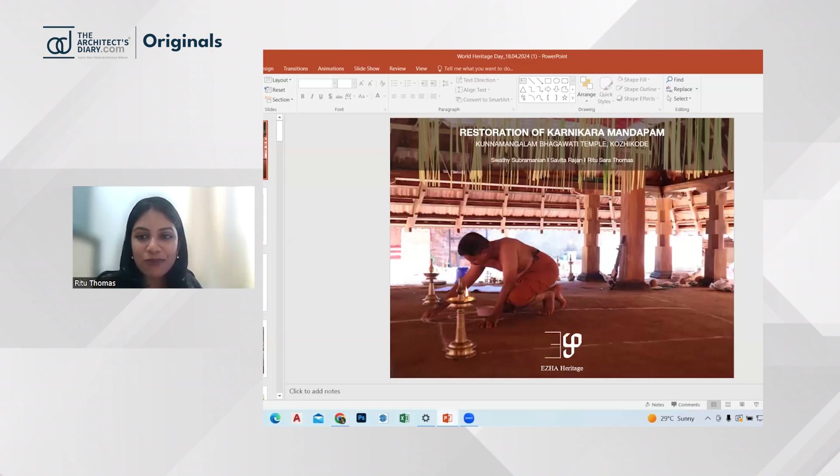I'm introducing to you the project, the restoration of Karnikaramandapam. This Karnikaramandapam is part of the Kunnamangalam Bhagawati temple, located in Calicut in Kerala, nestled within a very quaint village of Karuvanur. This temple is very significant - the significance lies not only in its religious importance, but also the deity goddess, the resident goddess Bhadrakali, is said to fiercely protect the sacred landscape, the surrounding hills, the streams, and inhabitants.

So the temple actually has a rectilinear sort of layout, which has a chuttambalam on the sides - that is, a surrounding structure - and there are 2 structures in the middle. There is a Sri Kovil, which we call the Sanctum Sanctorum, where the deity is placed. In front of the Sri Kovil is the Karnikaramandapam, or the Namaskaramandapam, which means the worship hall, where the rituals and prayers happen.

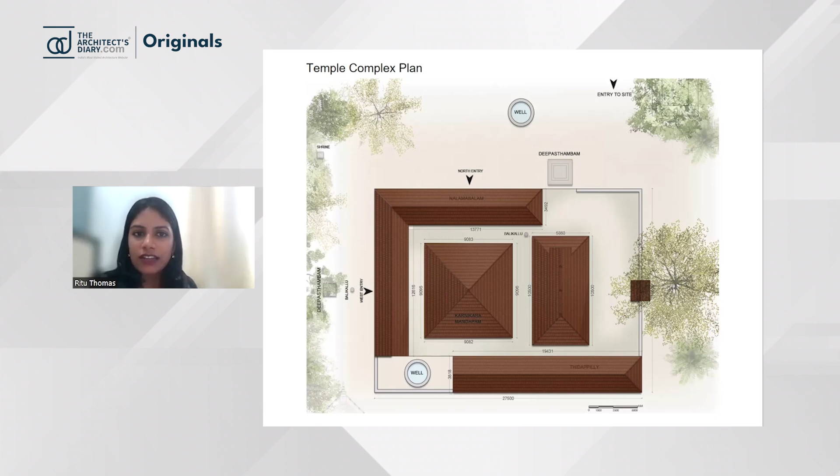But when we did an initial inspection, as all conservation architects do, and went for the site visit, this is what we encountered - teak wood in the style of architecture, with a laterite stone plinth, and the superstructure made of timber. There is mud flooring also on the base, which we call the plinth, or the adhisthanam. This mud flooring is used for rituals, prayers, and other ritualistic performances.

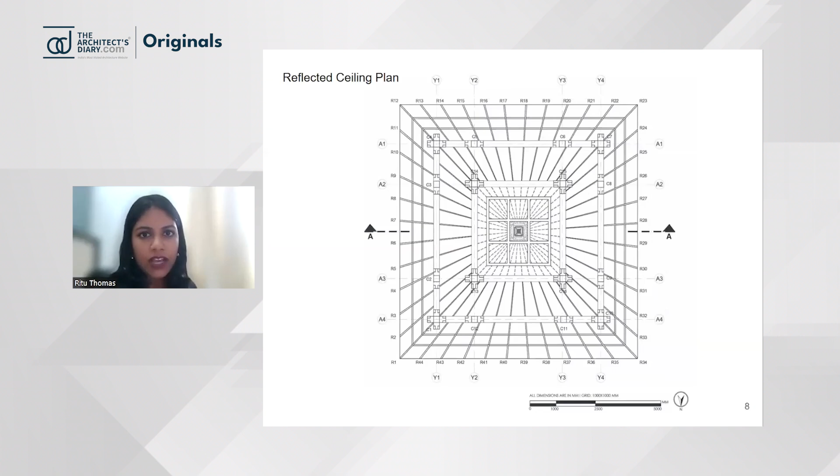Here, when we encountered this, we also did a very detailed documentation of the entire mandapam - the center and the rest pillars on the edges. The name Karnikaram comes from the number 16 - Karnikaram in local terms means 16. That is why the significance of the name comes about. It is also said to represent the 16 syllables of a mantra and the 16-petaled lotus. All of this signifies the name Karnikaram.

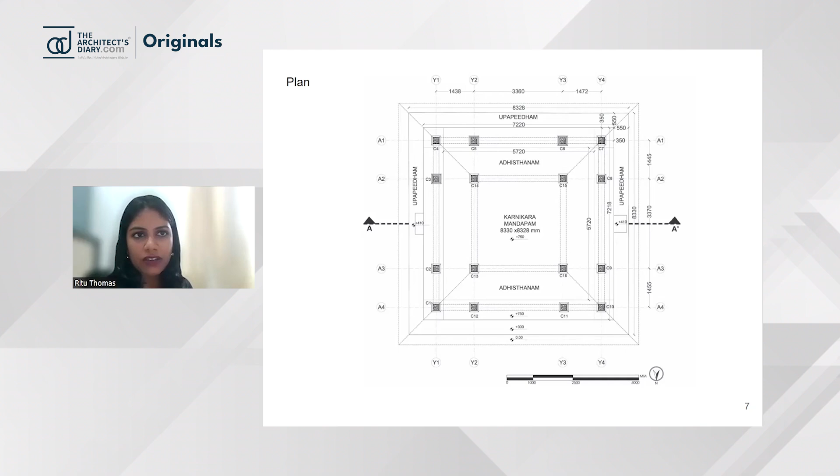So after this is the plan actually of the mandapam, and beyond that we have also detailed out the section and the reflected ceiling plan. The finial was actually missing - the finial is the top portion, or the crown of the mandapam, we can say.

This finial and the structure below it is called the koodam. These are very essential components of the timber structure, which holds everything together. So these were missing and deteriorated.

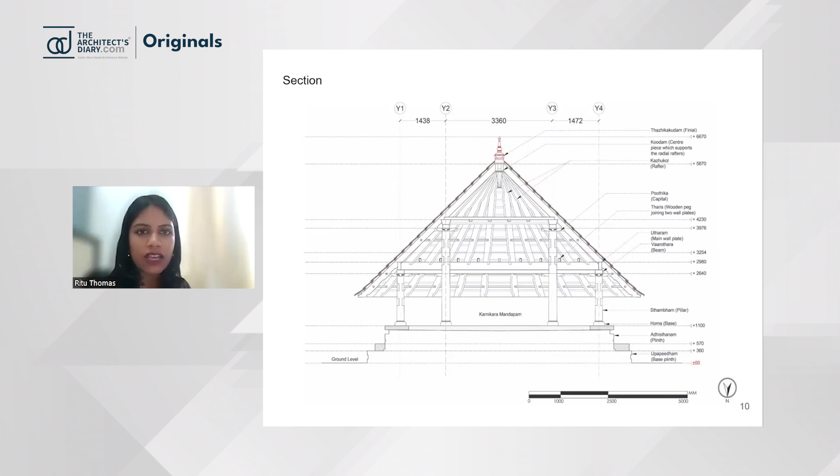When we actually encountered it at the very beginning, we saw that this was completely in a very deteriorated stage. There was neglect; this mandapam had not been used for a long time. So there was extreme termite infestation and water seepage could be found throughout.

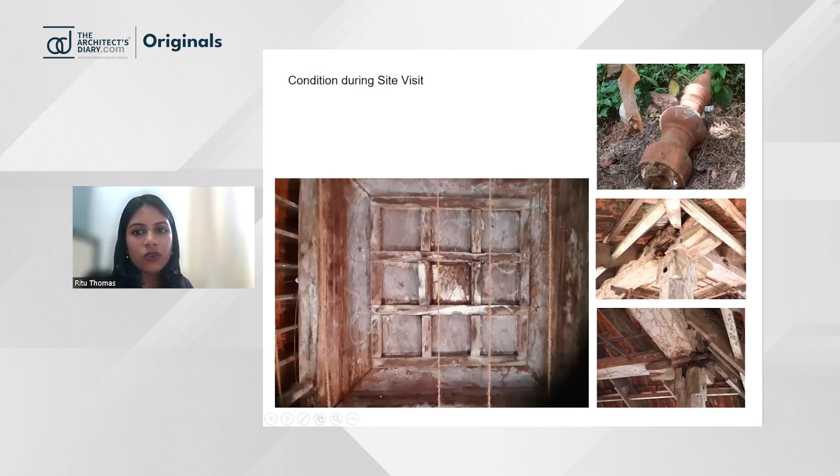This was the finial actually. The image on the top right is the finial we discovered on site later, the terracotta finial. We also took photographs, or detailed photo documentation, of the condition of the structure.

Not only was there termite infestation and water seepage, you can see that the entire column was actually hollowed out from the bottom to the top by termites. There were also fire hazards, because many of these rituals used oil in the mandapam. So there were fire hazards previously, and you could also see cracks and fungal rot.

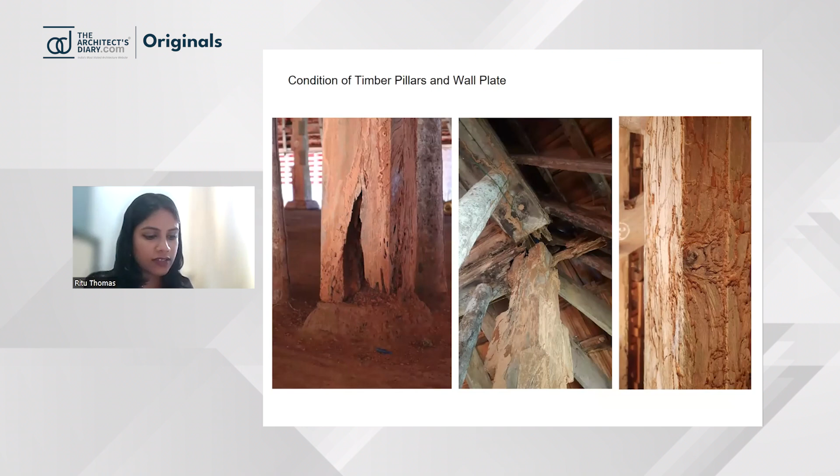So that was imminent. When we did a condition assessment of the building, we saw that the top portion, or the finial area, had caused extreme deterioration, leading to more than 80% of the timber being completely deteriorated to an extent where it could not.

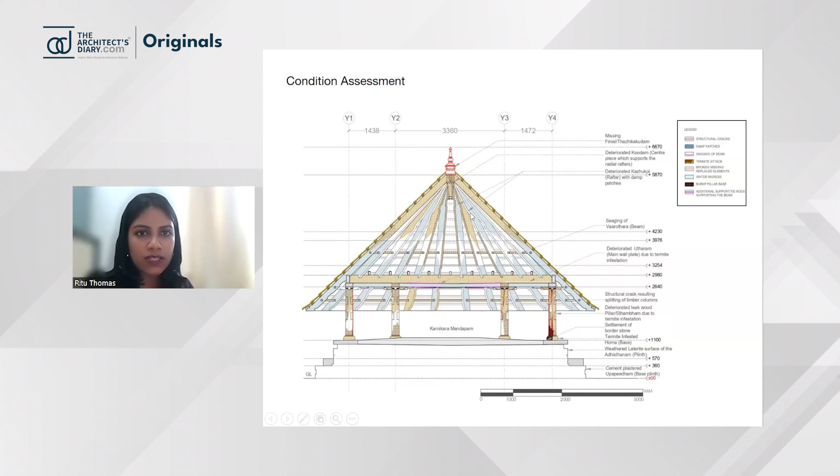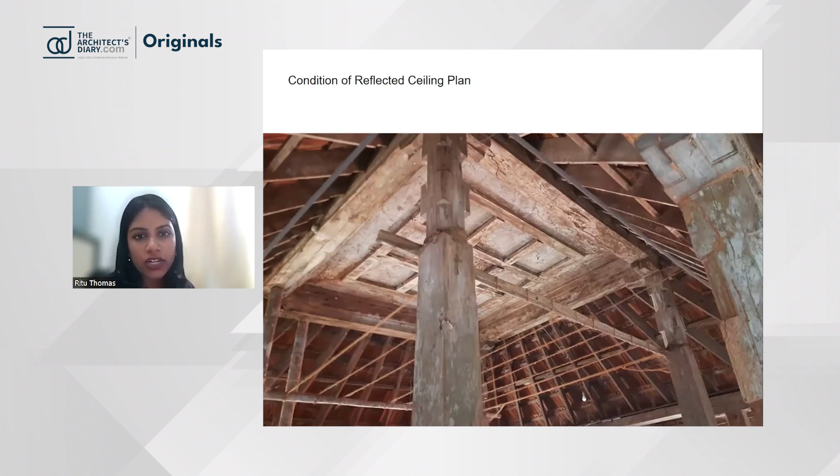It was on the verge of collapse. You can also see here that many temporary support measures, such as bamboo scaffoldings and steel tie rods, were in place to stabilize the whole structure, because this structure is very important for the temple festival. It was completely held in place temporarily, and this structure would not have survived another monsoon — it would have collapsed within the next year.

You can see the other deterioration here. This is a reflected ceiling plan showing all the detailed documentation of the condition.

The main challenge we faced was that we were told to complete the entire project — including documentation, proposal, and implementation — within a short time span of 2.5 months, because the annual temple festival was scheduled for March. We began this project in mid-January, so we had hardly 2.5 months to complete it. That was the challenge.

We had to do very detailed planning to schedule the works simultaneously, and plan how the conservation works had to happen. We know conservation is not a quick process, so meticulous planning had to be done.

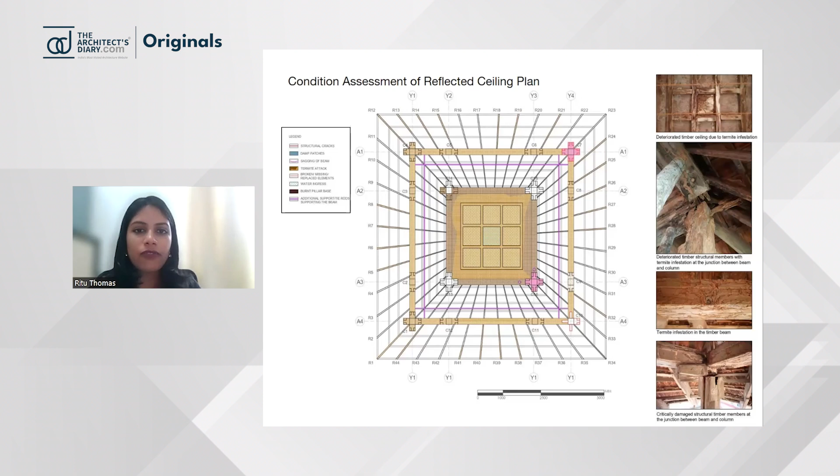Also, we had a financial constraint because we had an external sponsor who funded one-third of the project, but two-thirds of the funds came from the crowd, from the community — it was crowdfunded. So there was a very tight budget as well, and we could not be very extravagant in our design. Those are the two major challenges we faced.

So I'll pass on to Savita to explain our design philosophy, which is adopted by Ira.

Thank you, Ritu. The approach used for the restoration of Karnikaramandapam is rooted in ancient Indian treatises of Vastu Shastra and Tachu Shastra, with the help of traditional carpenters and acharyas. Vastu Shastra, in simple terms, is about creating spaces in alignment with natural forces and energies, whereas Tachu Shastra is about using locally available materials and designing in a way that does not harm the environment. So we've used these concepts.

The conservation philosophy we have applied here is Jirnoddharana and Punarudharana. Jirnoddharana means deliverance from decay, and Punarudharana means regeneration or restoration. So our conservation philosophy combines both: preserving existing stone and laterite fabric to prevent further decay, while restoring or replacing the deteriorated timber with the original materials.

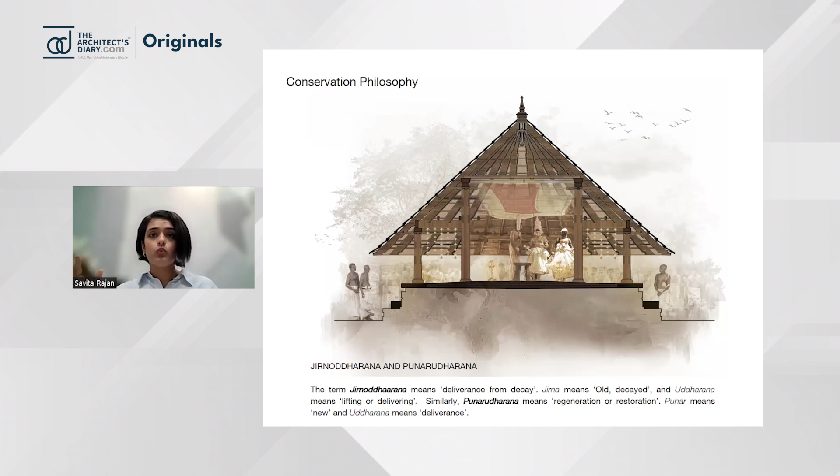Now we can look at the isometric view. When documenting traditional construction methods, it's very crucial to understand their purpose and how they work. Understanding this reveals how they strengthen the structure, and also enables us to learn from the tradition, which can be an inspiration for modern creations.

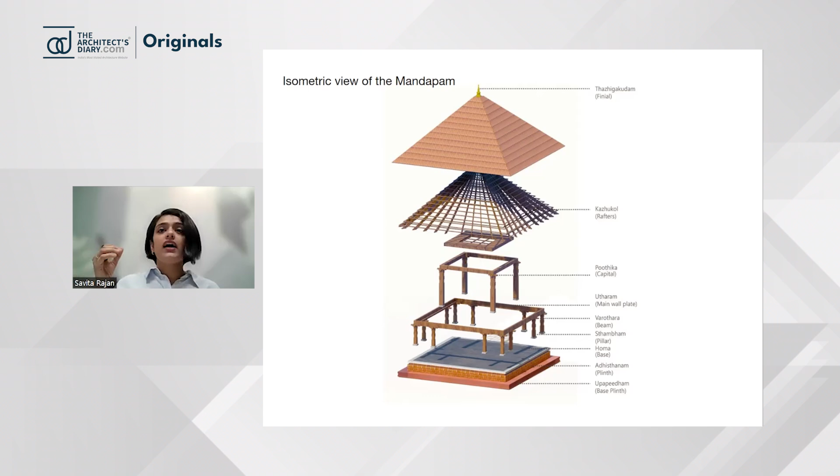The image depicts traditional structural elements with their respective names: the Upapeedham, the base plinth; Adhisthanam, the plinth; Homa, the base; Sthambham, the pillar; Varothara, the beam; Utharam, the main wall plate; Poothika, the capital; the rafters, Kazhukol, and Thazhigakudam. We also have the Kudam, which holds the Kazhukols, the rafters, together, which we can see in the further presentation.

Now we can see the dismantling work. The images show how the workers are meticulously removing the deteriorated timber roof structure, termite-infested structural pillars, and cement plastering from both the mandapam and the upapeedham. This had to be done very carefully because the laterite was chipping off.

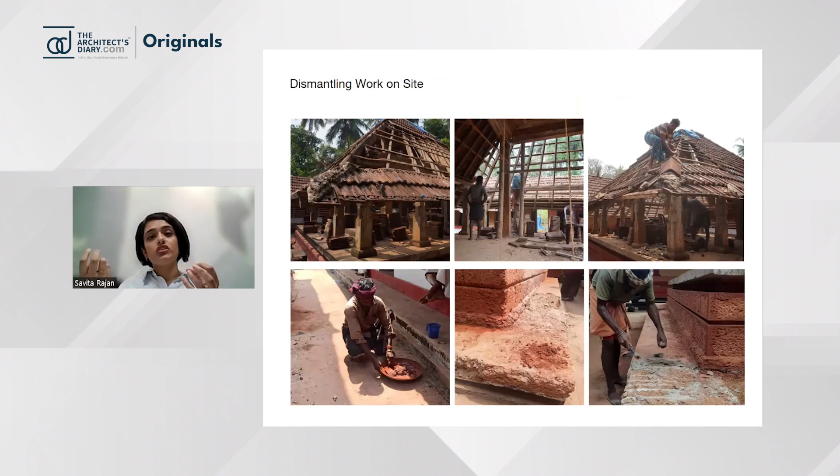This image shows the timber roof centerpiece, which holds the rafters together, called the kudam. It was very important to document how the previous kudam was, since whatever design the previous achari used will not be repeated by the achari in the present. You can see the design difference - the newer one is like a lotus bud, while the previous one is more blooming. It depends on the master achari, as they have the power to take that decision.

Now we can see the roof carpentry and tile fixing works here. The wood we have incorporated is Venga wood, with stone bases added to the pillars to prevent termite infestation from the mud floor base.

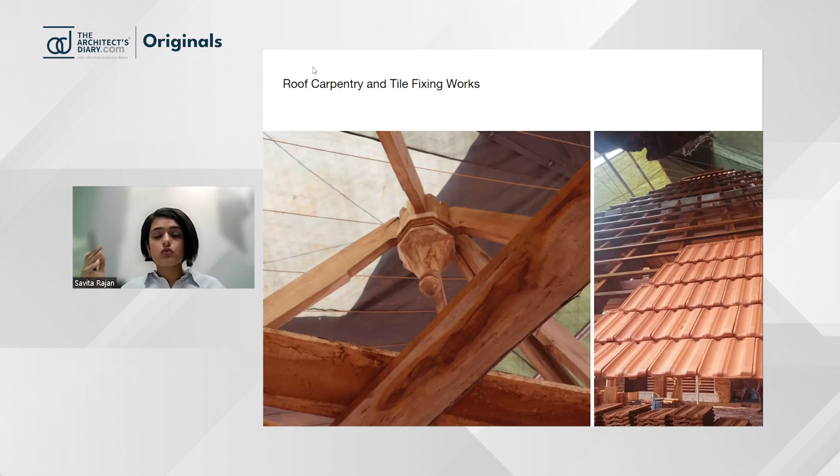Initially, it was all teak wood and it was fully deteriorated - there was fire hazard and everything. We had to take a call on what wood to replace it with. Venga is one of the woods allowed to be used in temple constructions, which also has medicinal properties and is cost effective. In this image, we have replaced the bases with stone so there is no direct infestation of termite from the mud floor base.

The next image shows craftsmen using traditional kol measurements to carve timber shafts and capitals with a lot of precision. The kol measurement is a traditional unit based on the forearm's length - one kol equals 70 to 74 centimeters, and it varies depending on the region.

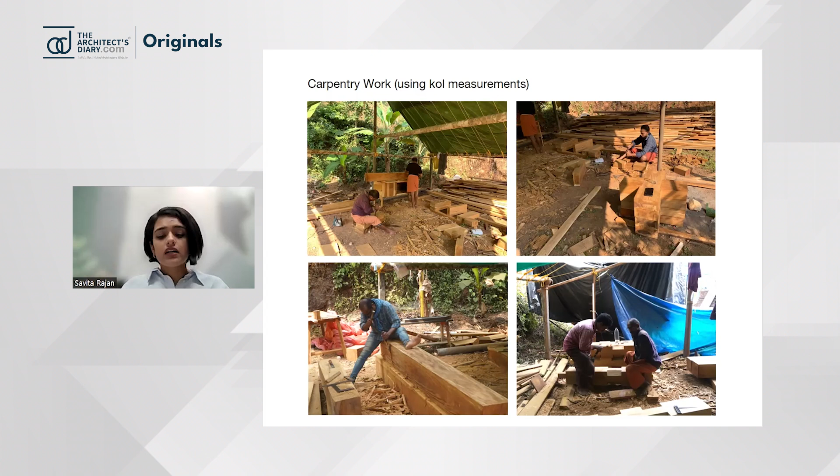Next, we can go to the assembling work. This image depicts granite stones being laid on the floor and platform, laterite stones being cleaned, mortar joints being pointed, and timber pillars and beams being assembled on site. We can see the whole process of how the assembling happens.

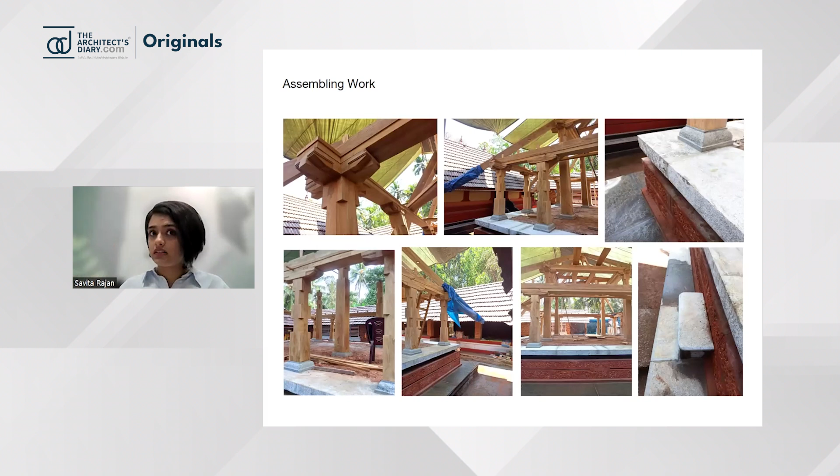Each and every stage of the conservation process has a puja. One such process is called anujna, which marks the beginning of the conservation process. This was done with a pujari, the main tantri, who comes and picks a date. Within these 2.5 months, they had to pick a very prosperous and auspicious date - this process of starting any conservation project in a temple is called anujna.

Then there is the decision-making procedure, called the Ashtamangalya Prashna, which is done before every stage of conservation. All the stages and all the pujas were documented.

Then we have the Uttaram Kutal ceremony. This picture shows a special puja ceremony to commemorate the installation of the roof of the mandapam. This event emphasizes how important the structural elements are in architecture, connecting both the physical and symbolic aspects of the structure.

This was a very interesting process for the given timeline. Instead of using a chemical polish, we approached a Vaidyan, a traditional Ayurvedic practitioner. The Ayurvedic oil applied on the timber is made by this practitioner using 32 special medicinal herbs, believed to prolong its life for over 1,000 years.

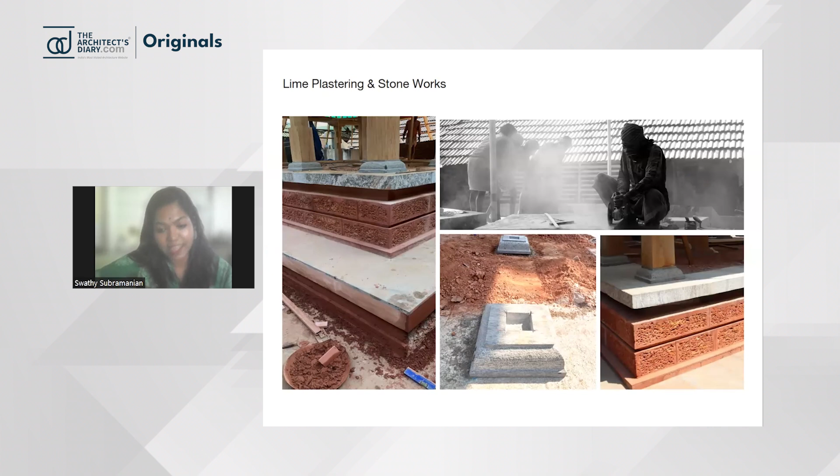Coming to the substructure of the mandapam, the base with layers of old cement plaster was removed and then plastered with lime and red oxide. The major intervention was the replacement of the timber pillar bases. The deteriorated wooden bases were replaced with original stone bases using evidence found on site. This modification was undertaken to safeguard the wooden pillars from rising dampness and termite infestation.

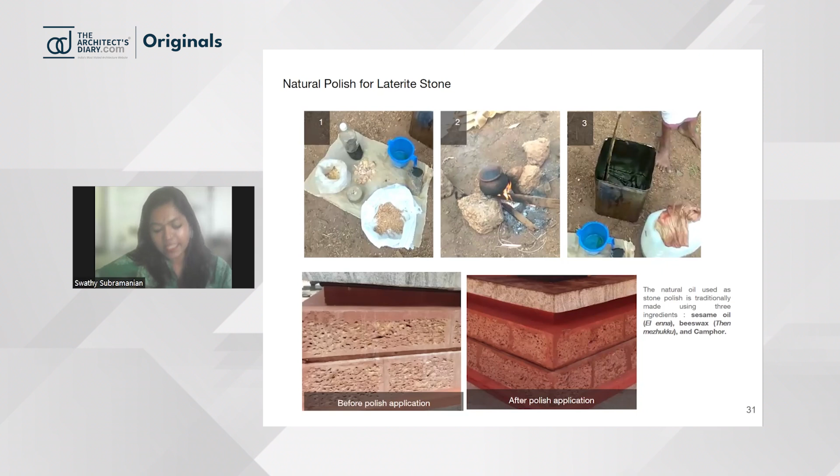The exposed laterite stone of the plinth, or adisthanam, is cleaned and coated with natural stone polish traditionally made using three ingredients: sesame oil, beeswax, and camphor. This process is carried out by traditional stone shilpis who begin the preparation of polish with a puja.

In addition to repair, restoration and reconstruction efforts, the proposal also incorporated reversible illumination to subtly highlight the exquisite carpentry work. Minimal illumination is proposed with diffused warm light, which reflects the same auspicious energy as the temple lamps and maintains the spiritual aura of the space.

The final conservation works included termite proofing and housekeeping. After consolidation of the mud floor, termite proofing was applied by spraying an herbal anti-termite solution made of plant extract.

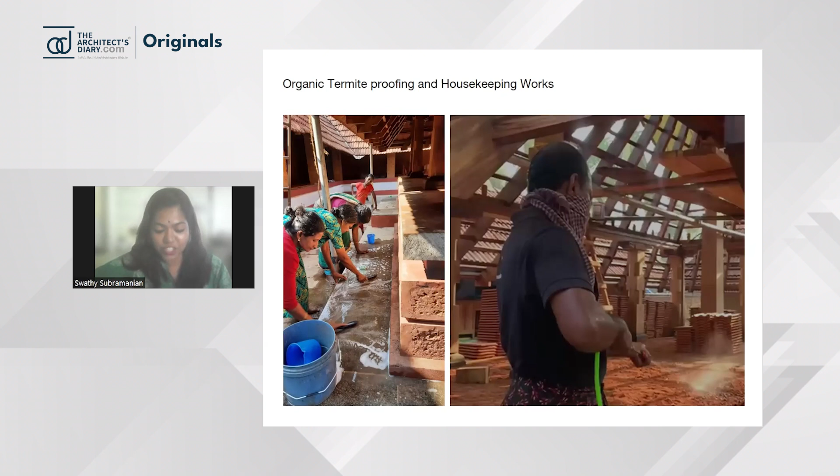Villagers of all age groups participated in the conservation works. The left side image depicts women devotees cleaning the base of the mandapam.

Finally, the Jirnodharana process concluded with the placement of Kaiga Kudam, or the female vessel filled with Navaratnas, paddy grains, gold and copper coins. Here are some before-after pictures of the mandapam.

This is a view of the mandapam before and after restoration, showing the mandapam within the temple complex, a view of the timber ceiling, and before-after views of the mandapam's interior.

At night, under the dimly lit temple lamp, Kalamarkil, or removal of the natural powders, the rangoli part, is performed in the mandapam. Towards the end of the performance, the performer dances and erases the color, or rangoli, using their feet. The flooring is done with compacted mud and paved with cow dung as per tradition.

This kind of natural material allows the performer of Kalamezhuthu to execute the performance with ease. The decision to retain the mud flooring was made in consultation with the performer. These images showcase the mandapam during the Kalamarkil ritual.

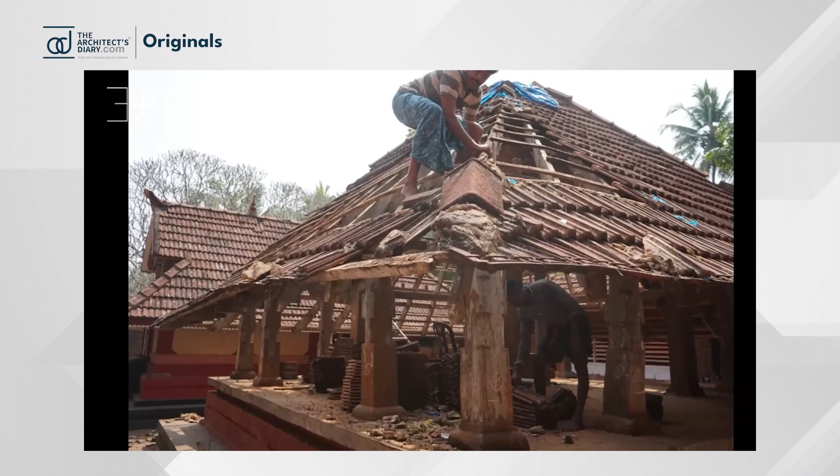The whole plinth was settled. All the wooden members and wooden columns with a wooden base were all deteriorated with termite infestation. From the base, the column had hollowed up till the top. Not only this, it has a missing Kudam or finial at the top. There were a lot of past retrofitting works done with steel rods, so when you remove one steel member, the structure would have fallen.

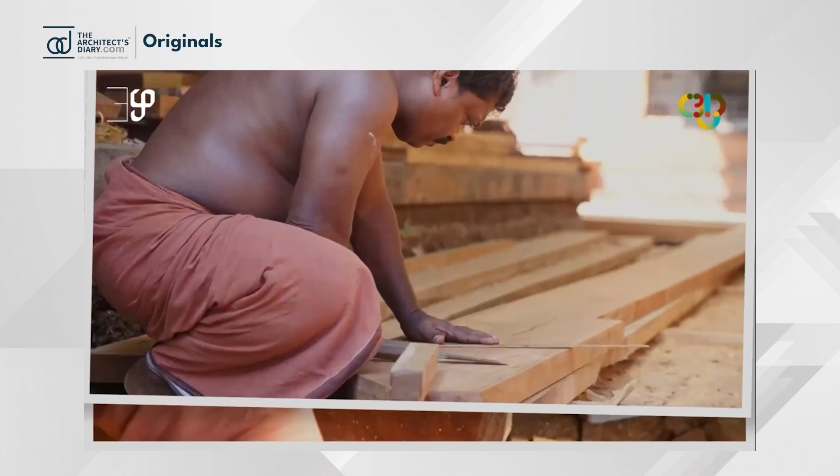The first step was to actually remove the incompatible materials and to reveal the structure and expose the masonry. Our whole conservation philosophy is to use local techniques and methods to revive this structure. We want all the local artisans of this place to come together and work with us to revive it.

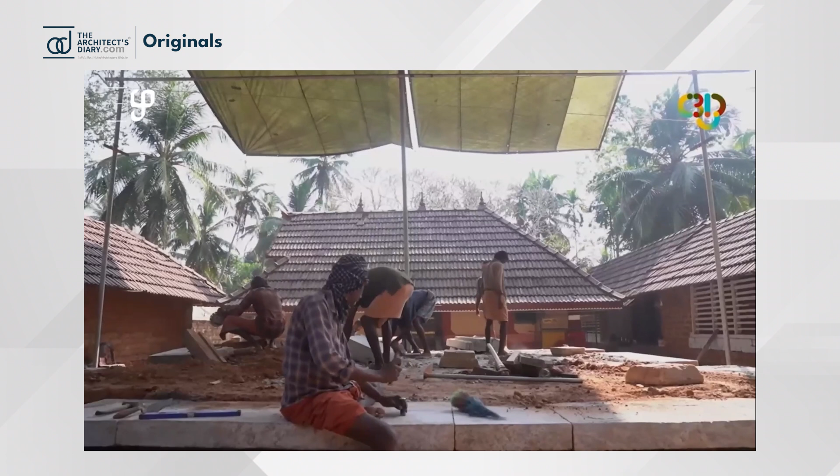The wood we used is Venga. It has medicinal properties, but it also needs some protection. We went to a Vaidyan who prepares an organic solution to preserve the wood, using around 32 medicinal herbs and 5 oils as base, one of which is linseed oil. This is prepared like how we prepare kashayam, Ayurvedic medicines. The entire process was very intense.

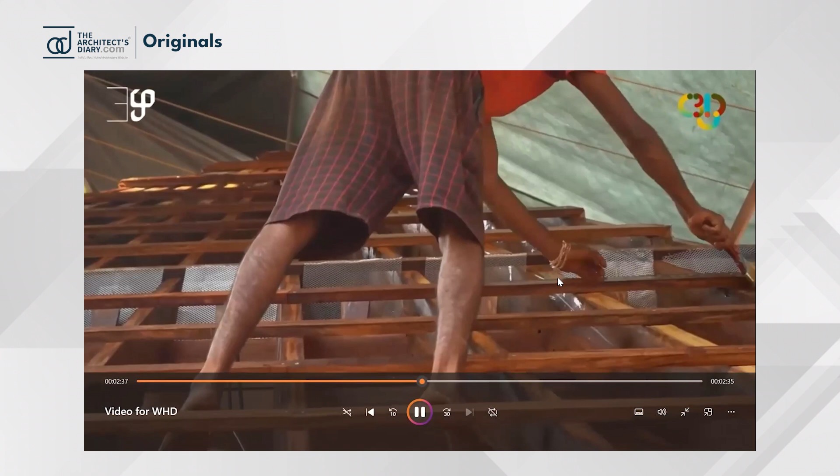When we look at modern structures, mostly wooden polish is used, which has a lot of chemicals. When these chemicals are used, there is a stinging smell and odor that comes with it. So we spoke to the workers as well, and they were really happy because this has an amazing aroma, and even the people who visit the temple are happy because of the aroma.

Now talking about the main part, the flooring of the mandapa where the Kalamezhuthu ritual happens, this was traditionally plastered in mud. It's a mud flooring covered with cow dung also, and it had a granite border all around it. So the challenge was to level out the granite border or stones and bring back the mud flooring and cow dung coating which was traditionally used.